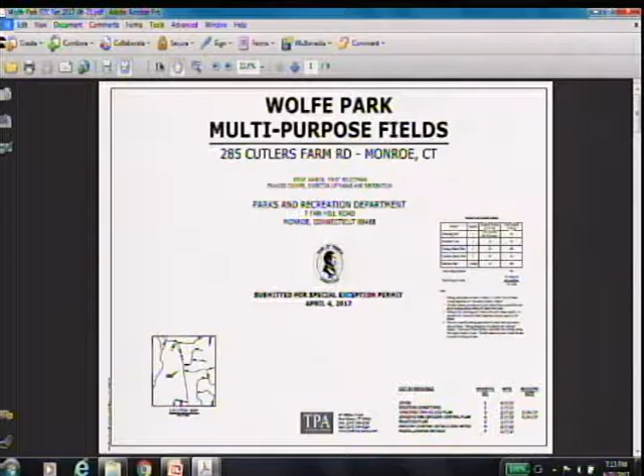Good evening, my name is David Sacco. I'm a civil engineer with TPA Design Group in New Haven. We've been working for the Park and Recreation Department for some time. We were actually the original designers for Wolfe Park back in the 70s, so we've had a lot of history with it. I'm just going to quickly introduce the overall plan and walk you through it.

This is an existing conditions plan of the portion of the park off of Cutler's Farm Road. You can see the entrance, the main parking lot, the existing swimming pool building. The tennis courts are right here, the playscape is right here. The areas we're going to be discussing are an existing open field adjacent to the tennis courts and a larger open field across the wetlands through the woods from the playscape and across from the other field.

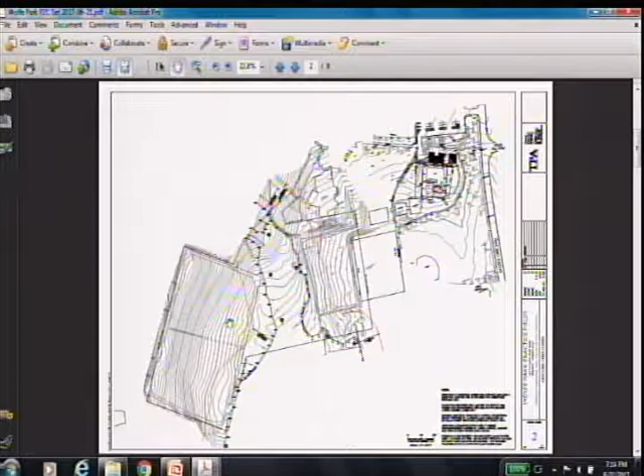We've been referring to this one as the west field and this as the practice field. Those are the two areas that we're looking at addressing. Right now it's an open lawn, periodically mowed for haying by a farmer.

In terms of logistics for developing the facilities, what we're proposing to do is get access to the proposed practice field from the parking lot along an existing asphalt walkway, across the lawn next to the tennis courts and into this practice field area. The access for the proposed west field will be along an existing bituminous path across the lawn, through the woods and into the west field area.

This was a subject that was extensively discussed both with the commission earlier on during development of the final plan, and also with the Inland Wetland Commission, and agreed to by both bodies. The Inland Wetland Commission approved it very recently. It was also previously discussed about a year and a half ago with this organization.

This is a plan and grading plan for the fields. The underlying idea is that we're trying to take advantage of what are already open areas, regrade them to the extent necessary to create playable surfaces. Essentially, right now they're just too steep to play sports on. We need to regrade them, cutting on one side, filling on the other side, in order to have a minor slope that will allow proper drainage, but not so much that it's impractical. What we're looking at is roughly a 2% cross slope on a field, something that's pretty typical for ball fields.

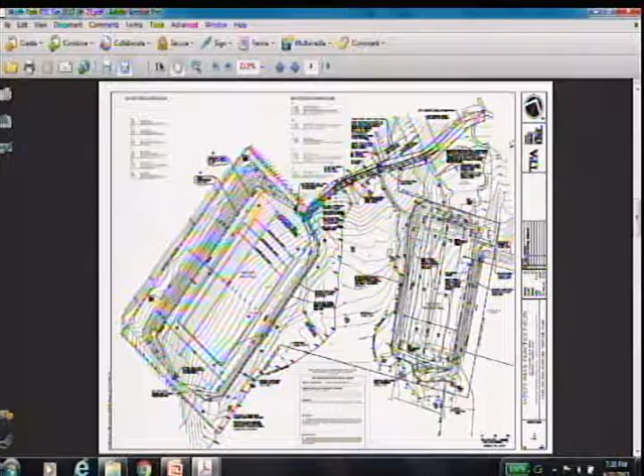The slope, rather than having a lawn that requires extensive maintenance and mowing, will be a kind of meadow mix that's intended to be mowed a couple of times a year, but not regularly - a mix of natural grasses and wildflowers that are native, so that it's drought tolerant and low maintenance. But it is consequently a potential tick habitat, so the fence serves to help keep balls, and therefore athletes, from having to go down the hill.

Additional planting that's proposed - there's going to be screening along the top of the slope here to minimize the risk of balls and equipment going down the slope and into the playscape. There's also going to be some screening plants along the toe slope here, between the field and the wetlands.

There is an existing stone wall here and here, as well as here. Those stones are going to be collected and reused to construct a wall along the limit of the field. So at the edge of the woods, there will first be the reconstructed stone wall, then a row of screening plants, and then the field with a planted lawn.

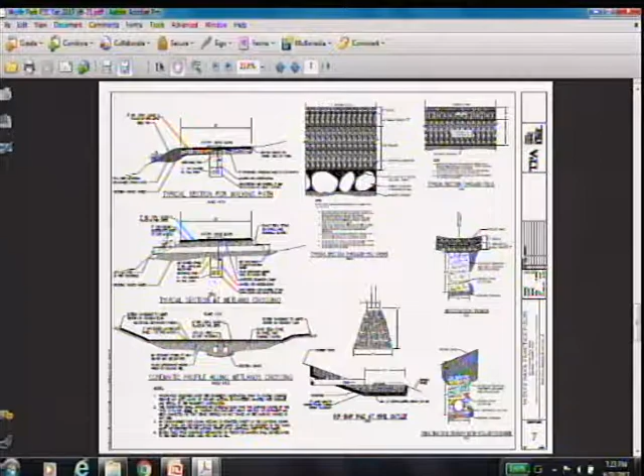In terms of construction logistics, the idea is that the contractor will move in, perform the work, and build the finished pathway on the way out. There's going to be a need to do some work, probably some minor limb clearing and a little bit of grading, in order to accommodate traffic in and out.

What we've tried to do is establish the grading so that the cut on the uphill side of each field is balanced with the amount of fill placed on the downhill side, so there's very limited need to import material. The topsoil that's there will be scraped up and stockpiled for reuse after the field is graded and ready to go. So mainly what's going to be imported for the west field is pipe for the sub-drainage, stone and fabric for the infiltration trench, just the specialized materials required around the drainage work, as well as materials for constructing the path.

The idea is that the base of the path will be established to facilitate construction, and the paving will be the last thing done. The contractor will more or less pave his way back out so the construction work doesn't result in damage to the path, avoiding repairs as he leaves.

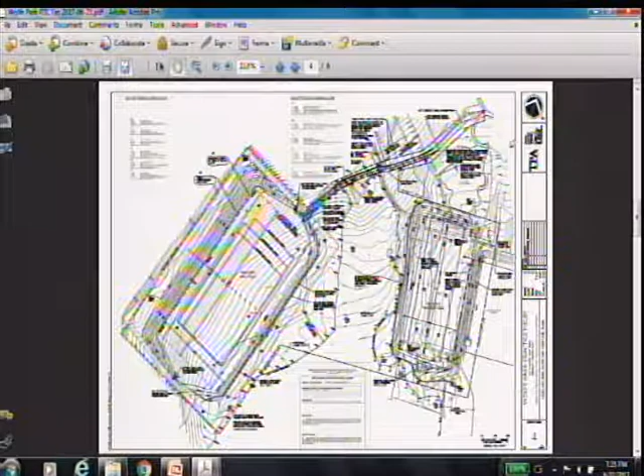I don't know if you want me to touch on this now or come back to it later. Why don't we wait till later. Okay.

That's really the high points. If anyone has any questions, I'd be happy to try to answer them.

Would you want to keep the field separate from the parking? We could, but why don't we go through everything first, since one might affect the other a little bit, and then there'll be questions.

For the record, my name is Scott Schatzwein, and I'm the town engineer. I've been asked to take a look at the overflow parking lot, which is being necessitated by the increase in the park with the ball fields and potential parking.

The engineering department has gone through and done some design work and come up with a plan for the parking lot. As I said, we're one of a team with TPA and the Parks Department, so we put together a set of drawings that you received in your packet.

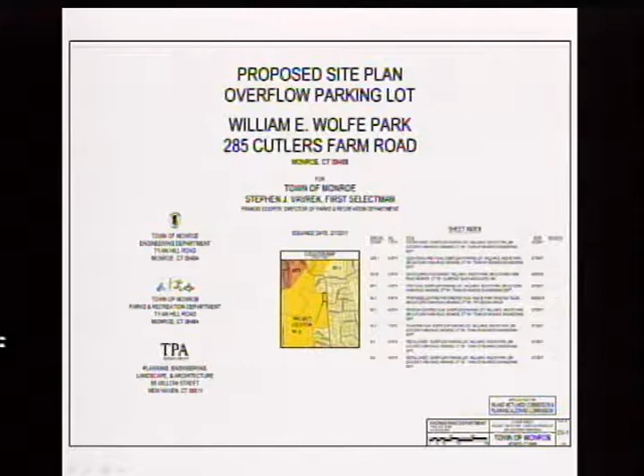For those who don't know where the park is, the overflow lot is located in the northeast corner of the park, about 500 feet north of Heather Road, in the area just north of the maintenance facility for the park.

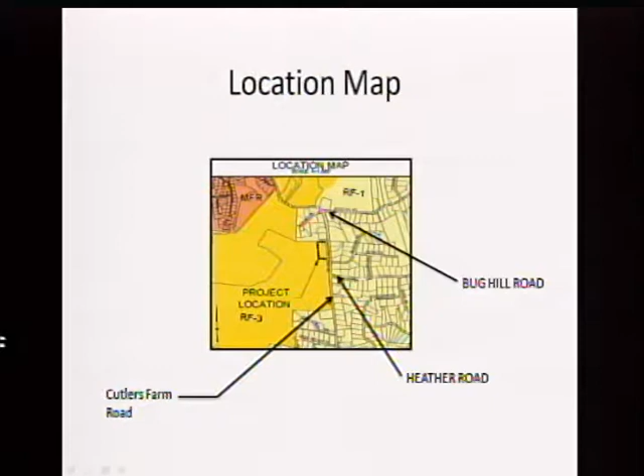Existing conditions: right now there's what we call the overflow parking lot. It's a gravel lot that has pretty much evolved over the years. There is no record of a specific approval for it.

Also in the park, in the existing parking lot area, is a storage yard used for storing equipment and materials used throughout the park, located in the easterly portion of the lot along here.

Also inside the parking lot are a few poles, centrally located. They're tall utility poles, and on the poles are some lights which also kind of just happened and evolved over the years. So those are in that area as well.

Right now there is a combined entrance into this area, just north of the maintenance building. Both staff, employees, and the public use this entrance to come into the overflow lot and park, usually when there isn't other available parking in the main lot. We've noticed a number of people seem to prefer parking in this overflow lot.

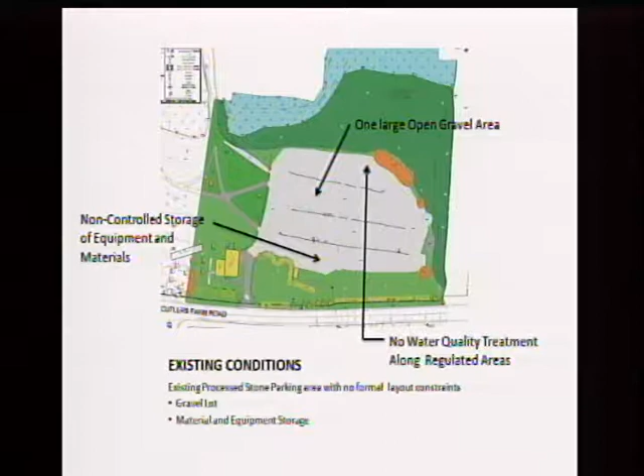For proposed conditions, we've put together a site plan to come up with the required number of parking spaces. We are proposing to use a gravel surface. Your regulations, section 6.1.13E, subsection 3, does allow that. It's allowed for alternative surface treatments in seasonally used parking areas, such as parks and public trails, etc.

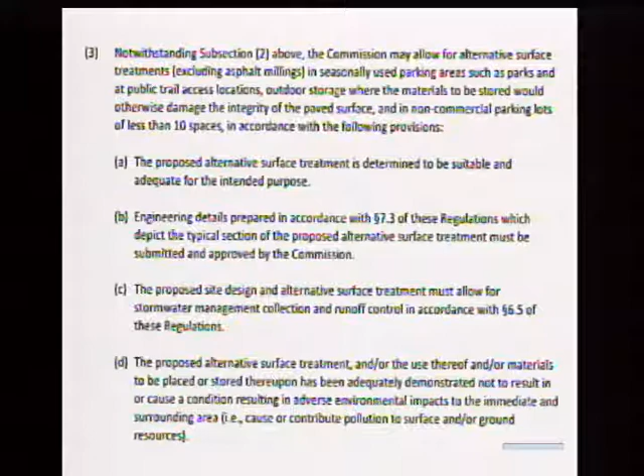The regulation lays out 4 items which should be addressed if that were to take place, and I've taken a look at that - we'll talk about it. But the proposal does include a gravel surface for the parking area, and the intent is that the parking lot is going to be used seasonally. It won't be used during the winter, so there won't be plowing operations, and it's felt its use will be infrequent enough to maintain the gravel surface. A number of measures will address that, and I'll get to that in a minute.

Going back to this plan showing the area, we have proposed a new entrance and exit along the north end of the parking lot, which has sufficient sightline. This drawing doesn't quite show the full sightline, but in the packet you got, it shows the full length of the sightline. It complies with the state traffic manual, so we were able to make that improvement, which will be quite an improvement to the existing situation.

In addition, by doing that, we're going to separate the 2 access points. This existing access will be utilized by staff only for access into a new outside storage area that is being provided as part of the plan. I'll give you a bit more detail on that in a minute.

Added into the parking lot is a number of measures that will address the fact that it's a gravel parking lot. The first is the addition of a paved entrance area, this dark shaded area. This will be paved so that any tracking of material will be kept in the parking lot area and won't be pulled out into the road. It'll also provide safety measures so that when people are pulling in, they have the benefit of a hard surface for turning and access when they're trying to find their way.

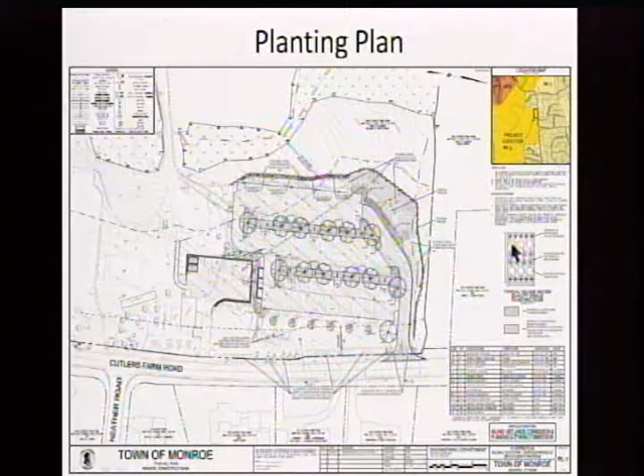This is just a blow-up of one area, but there's rows of different types of plantings. The first item is a Prairie Dropseed grass, if you will, that comes in clumps, and that will be put along the edge of the island so that it shades out the grass. It'll be clump after clump, they'll get a little fuller, but they won't extend into the parking lot or move around.

So those will grow, they'll hopefully be there during the winter, and toward the spring, they get mowed down and come up again. So there'll be a very short period of time when there's not great coverage there. But to address that, there are additional plantings. So that's the outer row.

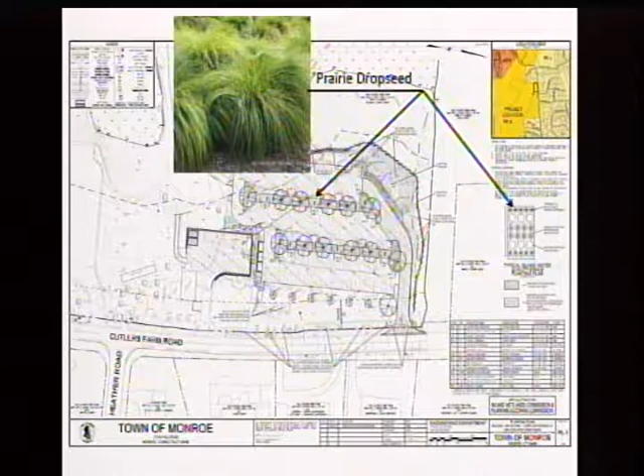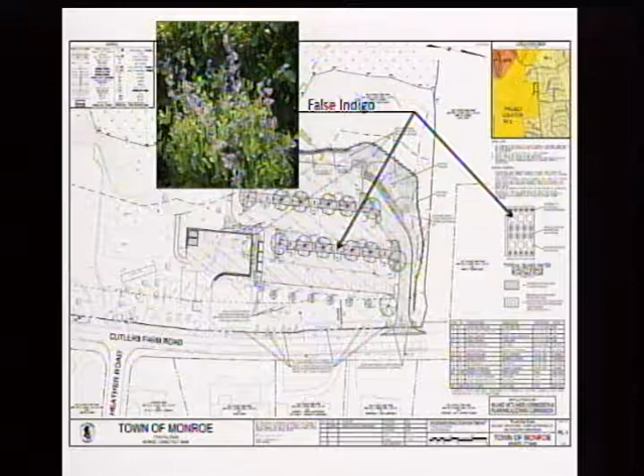The next row will be a false indigo, which is a little bit larger bush, a little fuller, and has a little color on it. That will help define the island. What we're trying to go for is kind of a rounded look, as we go toward the middle it gets higher, and it's definitely going to be a screening and really kind of a showplace aesthetically, to address this issue of gravel.

In the center of the island, we're proposing switchgrass, which will just kind of all grow together, provide the highest clump of greenery in the middle, and fill out the rest of the island.

Over for the fencing around the storage yard, if you look on the plans we gave you, it shows a chain link fence, and we will be updating that. We're going to get the specifications for it.

So that fence will sit just behind the block retaining wall that goes around this whole storage yard. There'll be a retaining wall, and on top of it, from down here in the parking area, you'll see landscaping, and then behind that, the stockade fence.

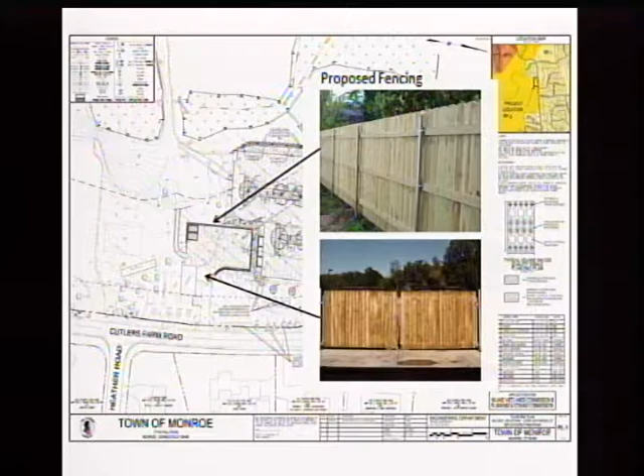Earthwork, the project calls for about 2,900 cubic yards of cut and 2,700 cubic yards of fill. So the goal was to kind of fill toward the west side of the parking lot and fill in this area over here, and up in here there's a cut, and over here there's a fill.

We're hoping that it really comes down to very few, if any, vehicles that have to move material. We'll probably want to utilize the material right on within the park.

Wetlands, this went through the Wetlands Commission, application 2017-01. That commission approved the parking lot. Matter of fact, they did not have any conditions of approval for the parking lot. They did have a few conditions for the other portion where the ball fields are going to go. I've provided a copy of their decision letter dated April 13th, 2017.

They're requesting that you guys look at putting some bollards on the entrance drives into the two ball fields just to keep traffic out of it, as opposed to just allowing maintenance and emergency vehicles in. And they asked that the fencing that David explained along the side of the field be installed so that there'd be a minimum of 6 inches along the bottom for any wildlife to get underneath and not have to go around.

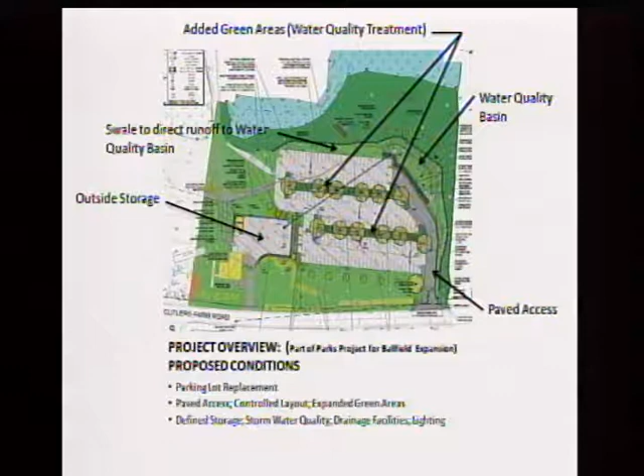The issue is that ADA requirements state that an accessible space and the path to it must not exceed 2% slope in any direction. Right now the existing main paved parking lot exceeds that somewhat. The Parks and Recreation Department is planning to repave and essentially reconstruct that parking lot, and as part of that process they will accomplish the grading necessary to make the spaces fully ADA compliant, because it really can't be achieved without significant reconstruction to shift the grades enough. That is a very near-term project for the department that will be tied in with all this other work, so as the need arises for additional or overflow parking, the goal of ADA accessibility will be met concurrently.

I'm going to interject here. Does this project require additional handicap parking? Is that why those spaces are being added?

The handicap parking is keyed into the total number of spaces provided. Okay, so it's not specific. Right now there is an excess of parking relative to the uses available in the vicinity of this entrance to the park. There is a parking summary that's been provided. Well, I understand that, let me just answer my question. Is the town required at this time to add additional handicap parking? It is not, on the basis of the total quantity of parking that is there.

Then why are you proposing to add handicap parking? Because the total parking available when the overflow lot is rebuilt will be more. So then part of this project does require additional handicap parking. Yes, then that has to be compliant. And it will be compliant as the project is being done. Part of what will be done must satisfy that requirement, compliant before a CO is issued on this project. Understood, okay, I'm sorry, go ahead.

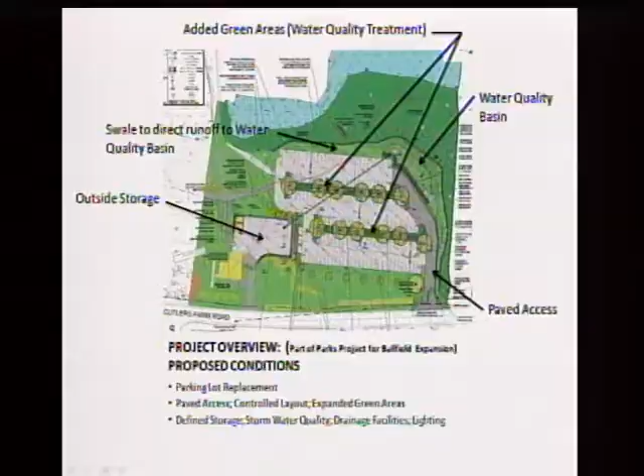The fixture that had been selected for the overflow parking lot was to be an LED, dark sky compliant, energy efficient fixture.

The fixture we were looking at is the one shown in the center here, this Lithonia D-series fixture. It was selected to be consistent with the fixtures present in the park right now. Historically, the park fixtures have been shoebox fixtures on the poles in the main parking lot. Those have recently been replaced with more efficient fixtures. We're trying to keep consistent with the park's own image and history in terms of what's present there, and at the same time provide better quality lighting, more efficient lighting, and dark sky compliant, full cutoff lighting.

Okay, I have a bunch of questions. Just to follow up on the ADA point: is there any requirement that says ADA parking has to be this close, or is allowed to be this far, from a particular use point?

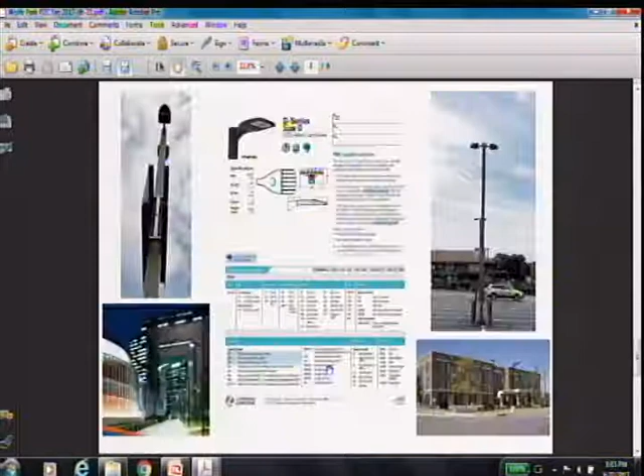It seems to me that it's a long hike to those new fields. But before I ask about that - regarding the existing overflow lot, since it's not clearly delineated where cars can park, what's your guess on how many cars park there now, or could max out at?

It was in the vicinity of 230 in the existing overflow lot. We tried to make an approximate count because it isn't striped - it's tough, so we ballparked it. The new parking lot is rated at 169, though I think we were a little higher than that, so somewhere in the vicinity of 180 or 190 spaces if you put people in there properly but densely. We're losing some spaces with the addition of the islands, but given that it's not a striped lot, whether you could ever actually achieve what we count by measuring is kind of doubtful. It's an informal lot, so it's never going to be as efficient.

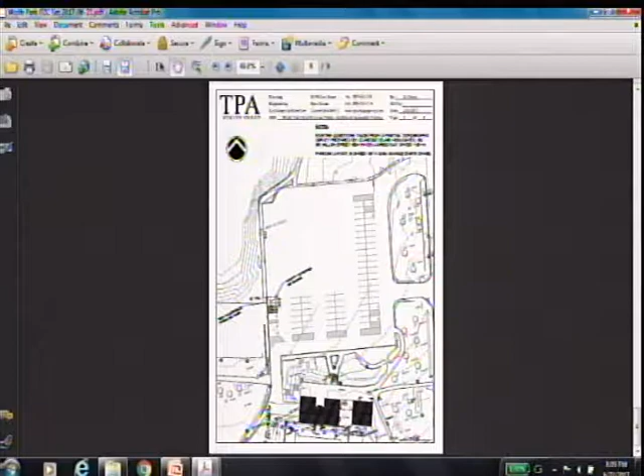Well, I think if you measured it out, it really isn't that much farther away - not a great thing, but not much farther than the current football field and fields 2 and 3 are from the overflow parking lot. Once the west field is done, realistically it won't be that much farther away.

As far as the senior center is concerned, I think it was a year or two ago there was some sort of restriction on that. The overwhelming majority of the time when the seniors are there, we're not going to have the type of park use we would after the seniors leave, generally 3:30 or 4 o'clock. So I don't see that being a significant impact or inconvenience on the seniors at this point.

I would point out a couple of things. There was a lot of discussion when we were here before about construction access to the west field, because one option considered was down off of Parkview, down a hill where you'd walk a couple hundred yards to the field. This will be the one distinct way to get there, aside from a path paved continuously from the parking lot. There isn't a good way to get there otherwise - it's all wooded in here, can be quite wet in season, and not amenable to somebody walking through.

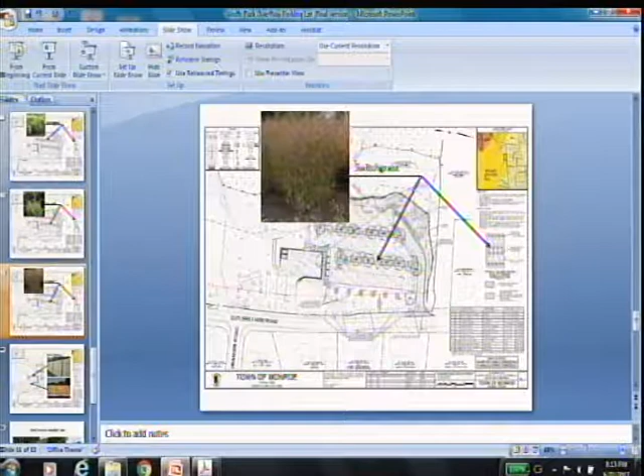Okay, I just have a couple questions. On the existing driveway, are you going to gate that to close it off, or will that be open? Yeah, the existing driveway has the gate I showed you in the photo. Okay, so it's staff access only? Yeah, that'll be fine, a stockade gate with the metal. So that'll be closed then? It'll be closed off, and it's not at the street. It's not at the street, it's even with the side of the building. So the gate is going to be right at the building, it's in the light lines there.

About where the arrow is will be where the gate goes in. Okay, are you going to use any signage over there to tell people this is just for town staff only? Yeah, that's a good point. I did not do anything in terms of that, but that would have to be done, and yes. That's one of the important areas, that's one of the reasons why we recessed that gate, because we do have the picnics that go on there. Many times the folks having picnics would like to drive in, and there's a little path right next to the building. I just try to prevent people from trying to get in there. We left it open so people can use it a little bit to unload things.

The other question, on the islands, do you have any guardrails around these, or anything like that? No, there's no guardrails, there's no curbing. I understand why you don't have the curbing, but what's going to prevent the plants from getting damaged by people driving into them? Well, there's trees in the island, in the center of them, right? Yeah, it's typical, there may be some potential damage for the first foot and a half or so.

That's why the bushes were picked, the grass is low enough that the car can kind of overhang it if it does, but the bulk of the landscaping is something that's going to stop people from hitting the bush in front of them. And they're not going to be on the very edge either, we have 15 feet that we're spreading these out on. Well, that was my only concern.

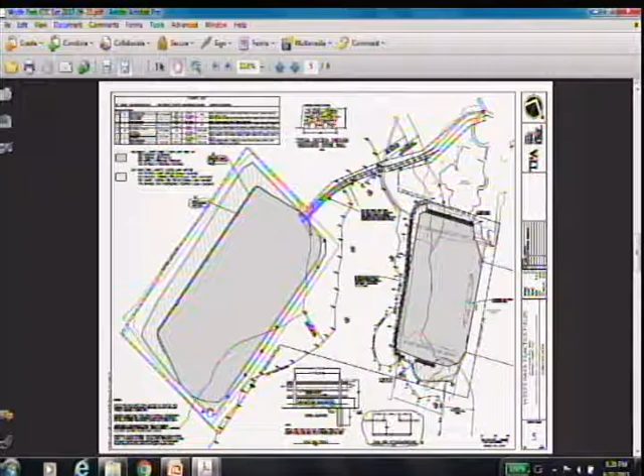With regard to the west field, it's essentially a hayfield now. What we're hoping to do is keep the uphill side of the field as lawn, with a gentle enough slope that people can sit and watch games. We're trying to avoid too much maintenance. It's framed pretty well by woods right now - there's a big difference between the environments. If you didn't know the west field was there, you'd have to go looking to figure it out.

It is pretty well screened from the park otherwise. The access path to the west field comes off the existing paved pathway that comes down past the picnic pavilion and the basketball court to this little loop, where the playscape is, and I believe that path connects over to the lake. So we're branching off that loop with a new path going out to the west field.

You're branching off where the playscape is. Right, just north of the playscape, skirting along the edge of the woods there, then through the woods to the west field. The path location was chosen because the existing grades were most amenable to putting in a path. We did look at other options, such as coming across south of the tennis courts and south of the practice fields, but this was the most practical given existing conditions and keeping disturbance to a minimum.

Being such a distance from the parking areas, is there ever any proposed option of adding an access drive from the adjacent roadways - you mentioned something about Parkview - or from the lake, to the west field?

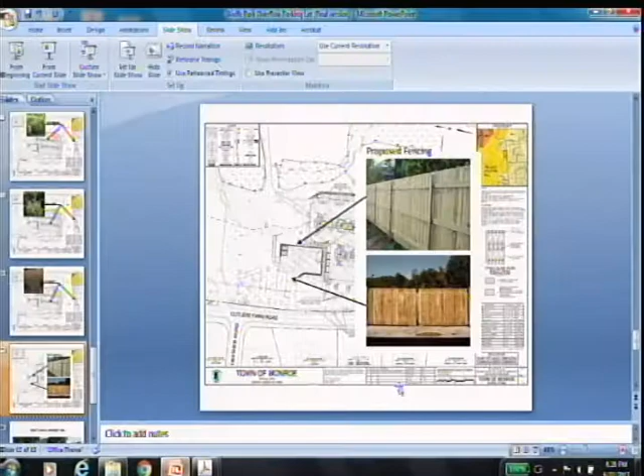How's the commission feel on that? Any issues with waiving the A2 requirement? No, that's fine.

We already talked about the handicap parking. Portable toilets should be set on concrete pads. I believe right now you have them set on a bituminous pad. Yes, I personally don't have an issue with that. Does anyone think we should require concrete for that? No, I don't have an issue with it.

The block retaining walls, that's just around the maintenance area? The modular block is around the back of the maintenance area. Is that the only place where you have gravity block retaining walls? The gravity block I'm referring to is the concrete block. Yeah, okay, but it'll be completely hidden.

What's across the north side and the west side? Northwest and a little bit of the south is all modular blocks, this typical keystone, similar to the block wall that's already in the park. There should be a detail on the plan for that. There is a detail. Yeah.

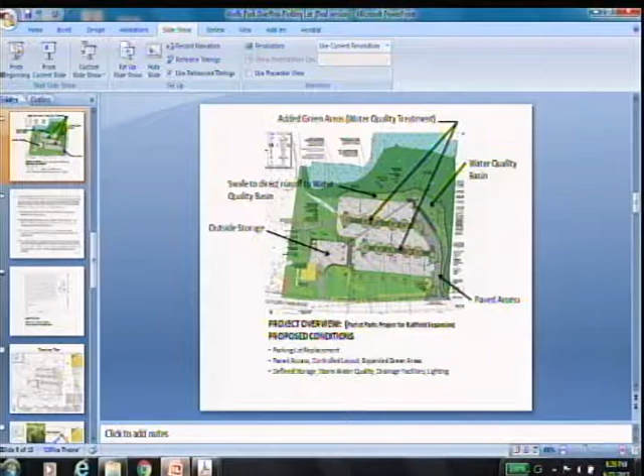I wanted more detail, not just a general detail - I want to know about the shape of the stone, the color. We need a block specified with a schematic detail. I could provide that. I was going to go with the same block we used in the park for the retaining wall next to the pool facility, so we'll use the same thing around the pool area.

Detail for the fence enclosure and the gate, identify the color and finish. You have the photographs there, so we should get something on the plan for the color and finish. Okay, concrete pads under the containers in the maintenance area - you show 2 pads in the maintenance area but they're not called out in any way. What are they? There are 2 storage bins. What is the construction of these rectangles drawn on the plan? I could add that detail as well. They're just going to be concrete pads. Okay, so you're going to have concrete pads, otherwise they get damaged.

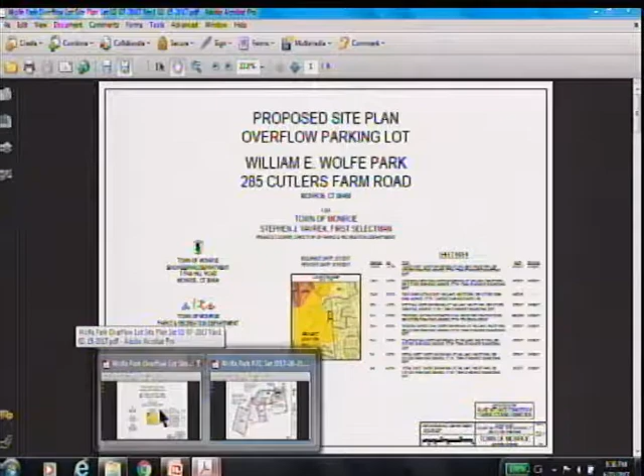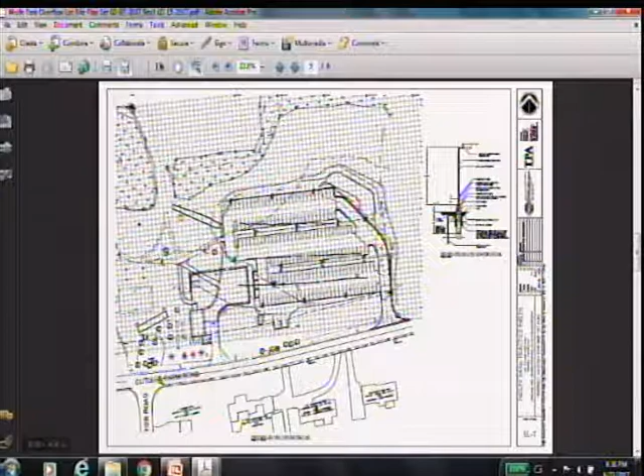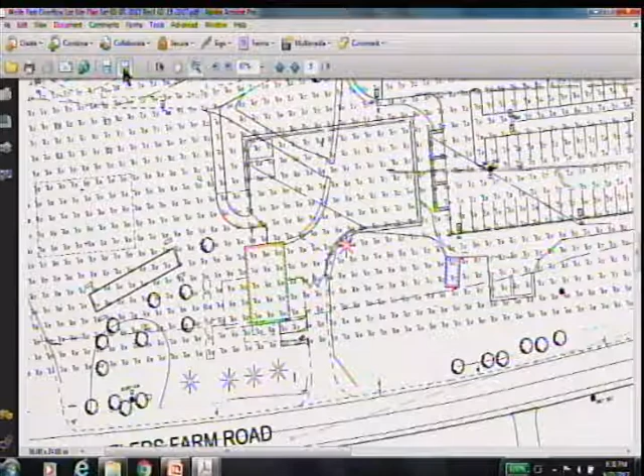It would be right at the entrance, behind the gate. It would come off the side of the building and illuminate the area where my guys walk in - again, it's more so for security. You have no intention of doing work there at night where you'd need illumination? No, it's more of a security light. Less light is better, I guess.

We already talked about having removable bollards on the 12-foot wide roadway going down to the field.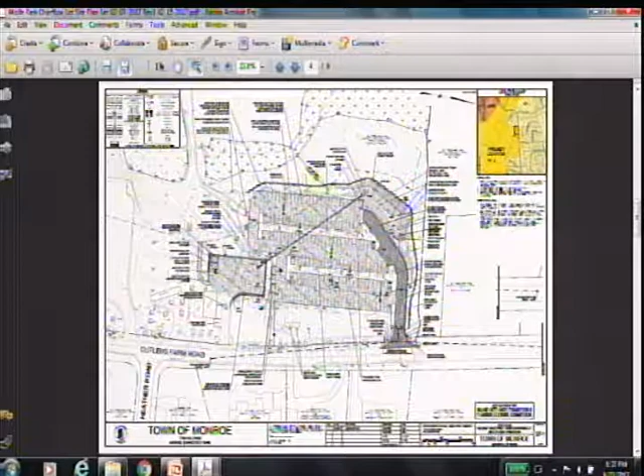At several places on the plan, where there are walking areas across the grass, you say if needed we put screenings. Could you just describe what screenings are? It's a common approach to doing a walking path - finely crushed stone, so that it compacts well. It's a good wearing surface, typically the gray trap rock, stone dust approach. That's all I needed, thank you.

The sleeves you're putting in where the wetland crossing is - do you think there's ever any intention that you'll have year-round potable water going down to that field? If you're going to put sleeves in, should you put them deeper now, or do you think that's not something you'll ever need? Well, anything that's going there is going to be seasonal at best, so we would blow it out, so you wouldn't have the problem of pipes cracking. The thinking there is that at some point, God willing, we need electricity through there, or water primarily for irrigation.

Just throwing it out there - put 3 pipes, because if you're going to run electricity, and even though everybody has cell phones, if you want to run any kind of low voltage electric down there, run it now, and have a water conduit too. Run 3 just so you have them. That's just a personal recommendation.

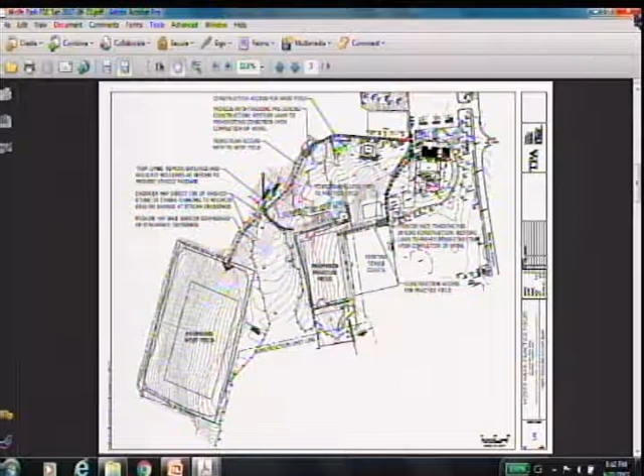Mr. Cooper, should have asked you this before I closed, but if this project is approved, what's your tentative schedule? Well, given that we don't have irrigation out there right now, it would probably take a couple of growing seasons. If we were able to start this fall, and get some grass planted on the fields, this is 2017, at best we might be able to use it in the spring of 2019.

And what about the parking lot? The paved parking lot, the overflow lot? The thinking there is that we anticipate using in-house forces to accomplish much of that. Public Works has the ability to do a lot of the grading, has those machines. We have the workforce and skill to do a lot of the other stuff. The planting's not a problem, that's right in our wheelhouse. The challenge is going to be building, getting the gravity blocks in, that's something we can't do ourselves.

That's going to require some significant work. Are you looking to start pretty quick? Well, we hope to start, we have to go out to bid, get some bid documents moving and see what has to happen. I'd like to get the parking lot started sooner rather than later, as a goodwill effort, given that it's one of the challenges we're facing right from the get-go. Do you anticipate starting work on that this calendar year?

All things being equal, we should be able to start doing some grading. We'd like to do some tree clearing to get ourselves out into the west field. That's something we feel we can do in-house, and we anticipate being able to save a lot of money. We have the manpower, we have the knowledge. Going out all the time for specialized contractors doesn't make a lot of sense when we can do it ourselves. That's the approach I've been taking ever since I've been here—having our people do the work I know we can do, and it saves us money.

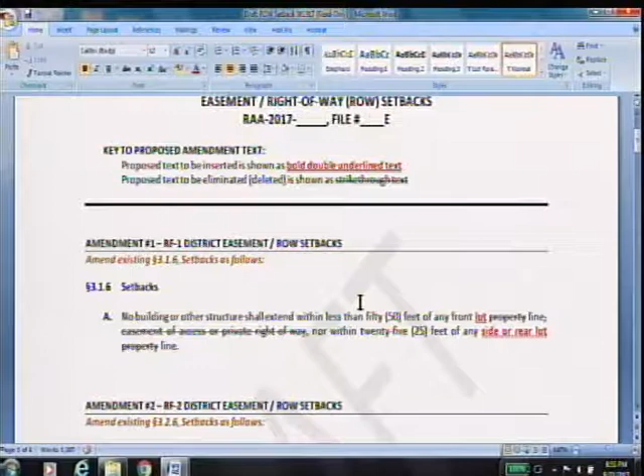We had a couple years ago a property that had two existing lots. They decided to share a common driveway because it was a wetland crossing. The easement came in all the way into the property, and then it split off to the two houses, but the lots were like 1 acre lots. They weren't very big. So on the internal, there's this artificial 50-foot setback that went around that entire easement, which made it very difficult to place the houses on these small 1 acre lots.

So basically, we're having a 50-foot setback at the end of where the thing split off, and that was right where the house wanted to be, the only few places where it could be. So in a few instances, this is causing some angst. We also want to encourage people to share a common driveway, and it kind of gets in the way because it makes their lots more restricted. It almost treats it like a road.

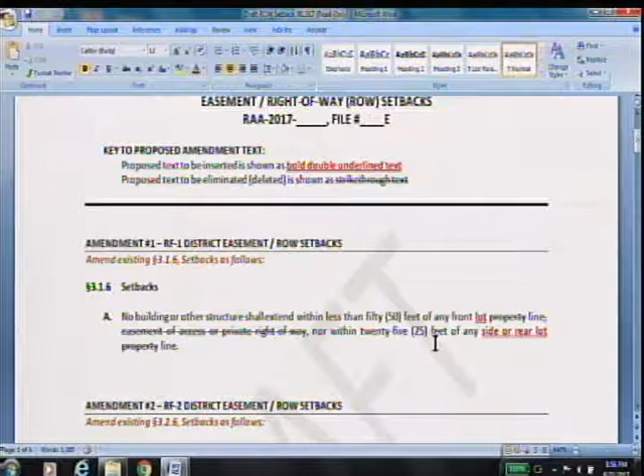Excuse me, Scott, you did say you are proposing people share driveways? Yeah, I just wanted to make sure I heard you correctly. But it's a disincentive if then you kind of lose all the land you can build in, so that's sort of the problem with doing some of those things. So what this amendment would do, it would eliminate that setback from an easement. And that occurs in multiple districts, so it actually occurs in almost all the districts. The setbacks would still pertain to property lines, but not to easements.

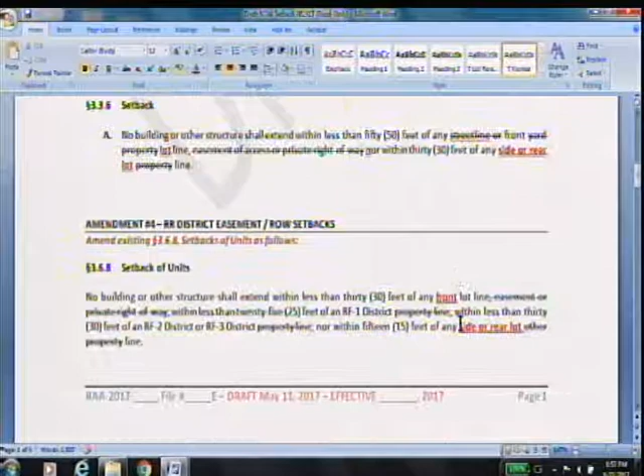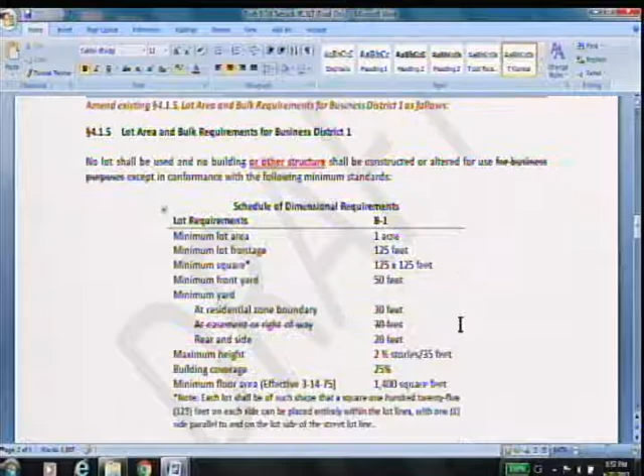Right, so there would be no setback from an easement, correct? At the same time, we're cleaning up language, using the same word throughout. Some of you will see that the wording is slightly different from one section, so we took the opportunity with eliminating this part to also clean up and be clear about the same verbiage. We're getting rid of the word 'property' and trying to make it the same in each district. That's another opportunity to clean up something in the code, and it occurs in all the different districts, the same kind of issues. So that's the intent of this proposal, to clean up some bad situations in the current regulation.

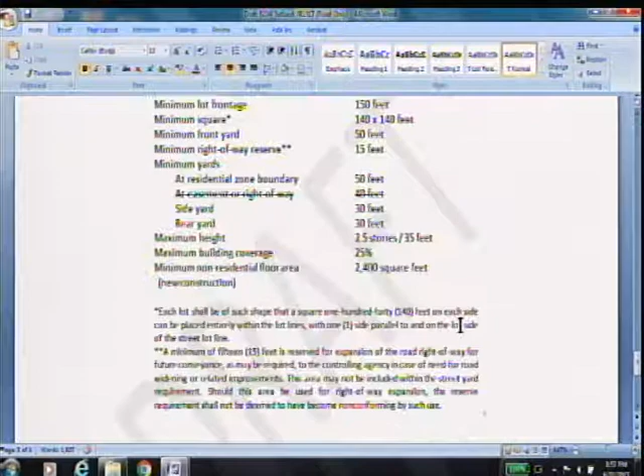Makes sense. Our process is, the subcommittee works on this stuff, we present it to the commission, and if there's a general consensus that we want to go ahead with this, then we'll schedule for a public hearing. So that's the point where we are now. Do we go ahead to the public hearing with this? Yes. Okay, so we'll schedule this for a public hearing. Thank you.

Next subcommittee meeting. Let's see. Monday and Tuesday are no good for me. I think Wednesday would be good for me. I'm good Wednesday or Thursday. Do you have a preference, Will? Yeah, I think Wednesday's better for me, but I could do either, yeah. Leanne? I'm good with Wednesday too. Want to do Wednesday? All right, why don't we plan on Wednesday? I'll let Michael know. Wednesday at 5:30?

We do have a couple of things that came in as follow-up from Dominic Thomas. And, was it yesterday? Yes. Attorney Ray Rizio was in a meeting with us yesterday and has something he'd like to take to the committee. He has a client that's interested in introducing a use, a crematorium. And at the same time, I think they want to add chapels and other things related, within a cemetery.